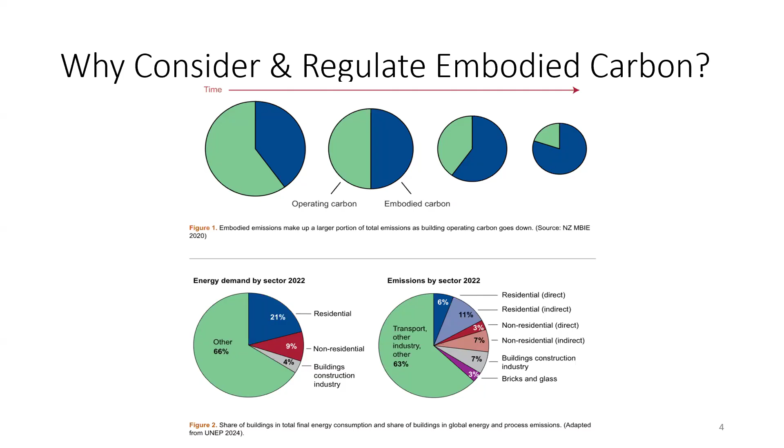If we go to the next slide - so there's a lot of work on how you break these into life cycle stages and modules. As Luke had said, traditionally we focus just on operational carbon, down at the bottom, the B6 and B7 categories. I suspect there are people participating who know a lot more about this than I do, but we break things into upfront carbon, the products and construction, A1 through A5, then what happens in the use of the building other than the operational, then end of life. All of those are called embodied, the A, B, and C other than the operational.

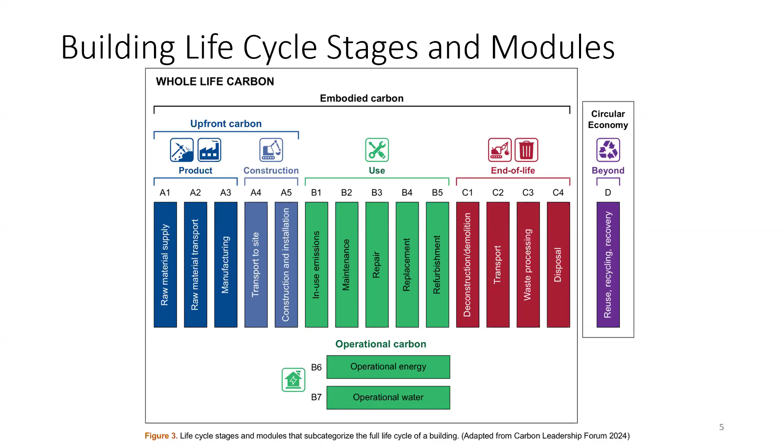When you put the embodied and the operational together, you end up with whole life carbon. This comes from a number of different international and European standards, some of which are in the midst of updating, and we'll talk more about that. The terminology around whole life versus embodied - we spend some time in the report trying to get into the distinctions of that to be clear. I think a lot of people are focusing on embodied, whereas in Europe, whole life is more of the terminology typically used.

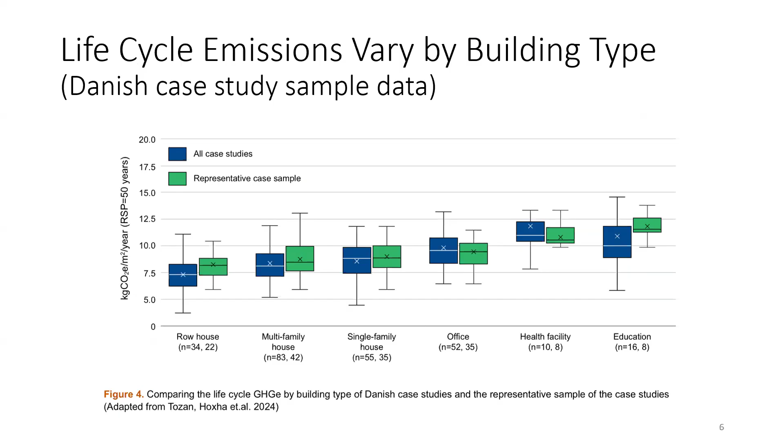So life cycle emissions will vary by building type. This is just some data from Danish case studies that led to their limits, and I'll talk about it in a moment, but the European model has more been set limits, and I think that's some of where Australia seems to be potentially evolving. This was just a sampling of a bunch of different building types - they had a larger number of case studies, then did some data cleaning. In the report, we also refer to a Canadian study in Ontario that looked at a similar, even wider range of variation by building type.

So in the report, I'm not going to get into a whole lot of detail here, but we did a deep dive trying to understand what the policies were, then summarized each of them into a page or two with a brief summary of coverage, specific scope requirements, supporting policies, and sources for additional information.

The mandatory carbon limits at this point, from a mandatory regulatory perspective, are in place just in Europe. It's great that we have Louis to speak about the French experience, and the European Union updated its Energy Performance of Buildings Directive in 2024, with a real roadmap that Bunthan will take us through.

We wanted to also look at some other mandatory requirements beyond just the limits, and we highlight in the report the City of London, Vancouver, and the state of California. Much more detail on all of these is in the report.

On the mandatory carbon limits, some of you probably already know, but these limits set a cap on the total emissions over a reference study period. The reference study period is usually 50 or 60 years.

Next slide. I'll warn you, the next few are not intended for you to read. It's a bit of a teaser to take a look in the report, but we tried to take all of that information on the deeper dives into the 9 leading jurisdictions and summarize them in a few tables.

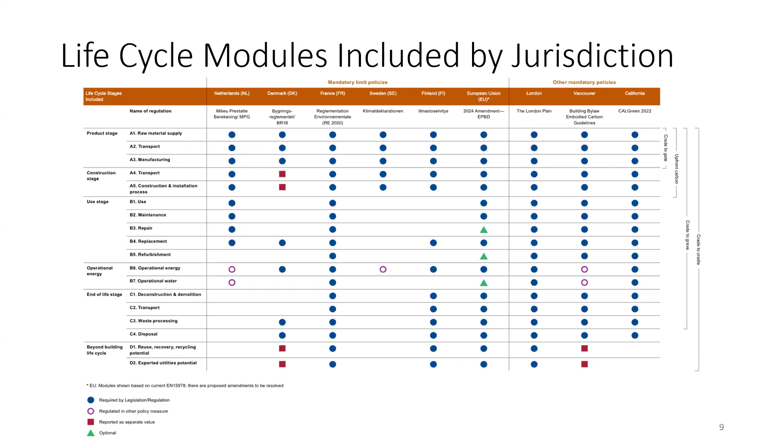The one other piece I'd mention is you can see on the right the different ways these groupings are called - cradle to gate for A1 to A3, upfront carbon A1 to A5, cradle to grave, and cradle to cradle. So you know some of the expressions used for what's included in these policies.

Next slide. This one, what we tried to do was look at the different building elements that are covered - really the base building, the substructure, superstructure, enclosure, and in many cases some of the interiors. But it varies a lot - what's covered, what's required, what's optional, cases where it's required via proxy or estimated values, and sometimes not required at all.

I'll say that a lot of these policies are evolving quickly, and even in Europe, some that were proposed a year or two ago with rules set to take effect - particularly in Denmark, Sweden, and Finland - are changing now because of the European Commission regulation and requirements that Bunthan will talk about in a few minutes.

Again, much more detail on all of this. I'll also say that from the European perspective, there's a much more detailed breakdown of the different building elements, but we couldn't get to that level of granularity for the policies outside of Europe.

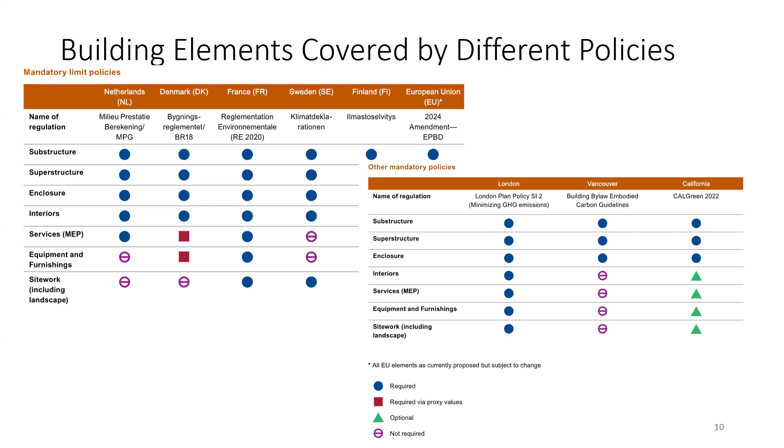Next slide. Again, we'll talk about it more in the report, but just to point people to it - there is a lot of international standards activity. Some of the early work was done through the European Committee for Standardization and the CEN standards. One of the foundational standards is EN 15978, which established the different life cycle stages. That's in the midst of a revision that perhaps Bunthan or Louis can speak more to.

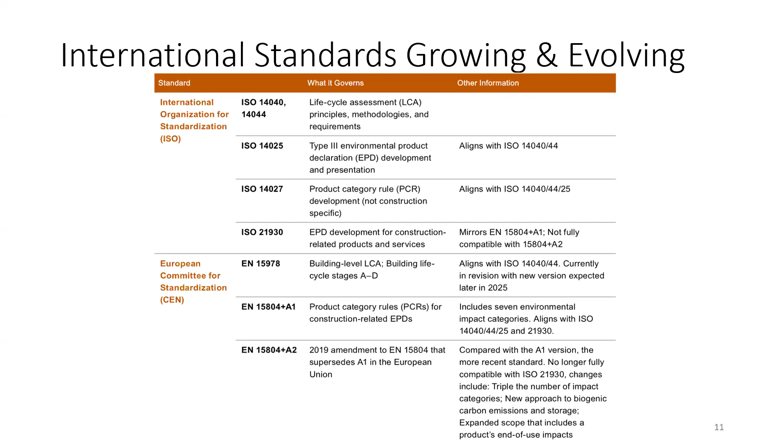Some of those standards have also been converted into or further developed into international ISO standards, many of which are in the midst of different revisions as well. Next slide.

So one of the things we tried to do when looking at all of the activity was see, for jurisdictions that don't have mandatory policies in place yet, what are some of the key embodied carbon policy design features. There was an excellent report pulled together last year by the Buildings Performance Institute Europe that looked at the key design features that need to be decided as part of any whole life carbon policy. I think some of this was in development around the time the European Energy Performance of Buildings directive was being finalized to include whole life carbon. For places that don't yet have embodied or whole life carbon policies in place, I really encourage you to take a look at this Buildings Performance Institute Europe document as a great source of information.

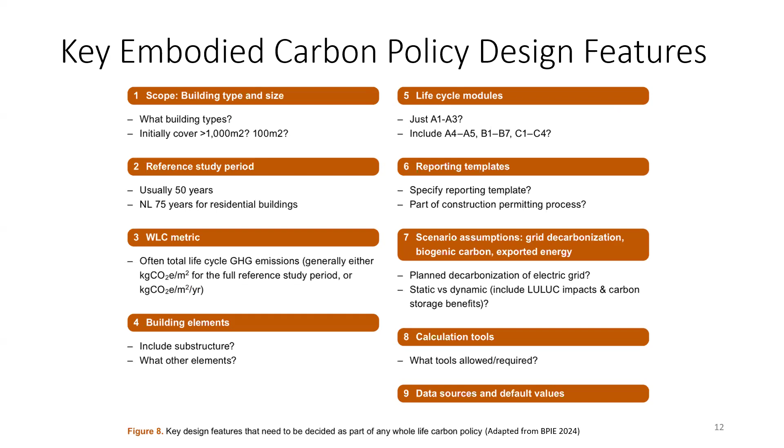But then really a lot of information about getting stakeholder involvement and data. You'll see in the report, access to data, availability, and digitalization of environmental EPDs, really trying to get people and main stakeholders familiar. I think this is where Louis will be able to speak to how things have evolved and gave us some great information about how the French process has evolved over the years.

Next slide. I'm going to point you toward the conclusions of the report. It's relatively early days. The Europeans are really way out in front on this. I think we heard from several of the European leading jurisdictions that they are seeing a lot better data collection and consistency in reporting, though it's somewhat early to understand whether we're seeing drastic changes to construction practices yet. There's a lot of variation. You can see from the summary tables how the coverage of things varies a bit.

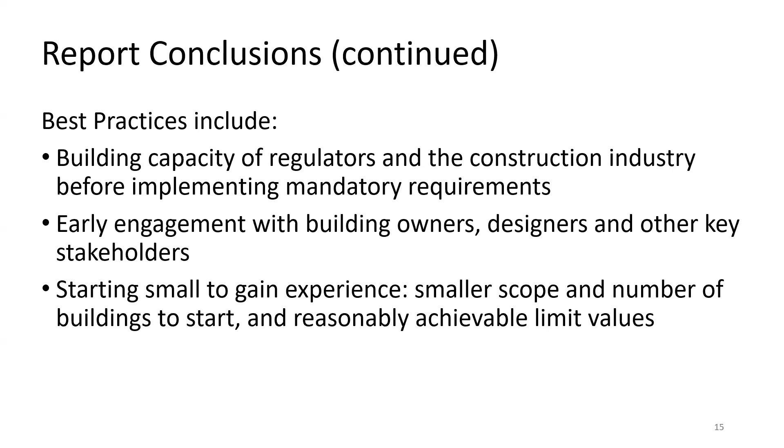And last slide, here's a link to the full report. Maybe we can paste that in the chat as well if people want to look. And I've got my email address here. And with that, I'll turn it back over to Ivana.

Thanks, Adam. Yeah, that was really interesting. I know you mentioned how quickly these policies are changing and evolving, and I think you can definitely see that in your research.

I know when NABERS started looking at developing an embodied carbon tool just a couple of years ago, at that time it almost felt too early, and it was like 12 months later that it was too late. So it's really interesting to see a lot of that also reflected in your research as well.

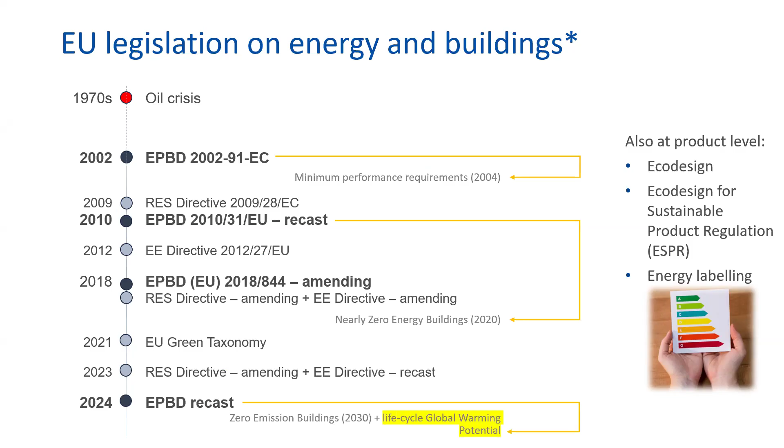The idea behind introducing these new provisions is that the directive recognizes the fact that buildings, during their whole life cycle, from construction, use, to end of life, have emissions throughout. Not only during the use phase, which is related to energy and has already been covered for many years in the directive, but they begin to consider also the other parts of emissions, including the production of materials, the construction of the buildings, and of course when the building is demolished at end of life.

We've seen in a couple of studies in Europe, when we look at emissions of the building stock, for certain years the big bulk of emissions, about 80% more or less, is related to operational emissions, while about 10% or more are related to embodied emissions, which is of course less than the operational part. But we have to understand where they are coming from.

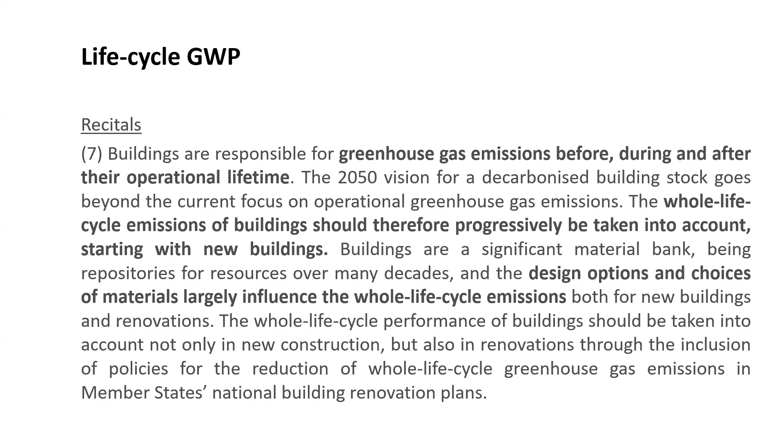In the latest version of the directive there are two main provisions related to life cycle global warming potential calculations and limit values. The first is Article 7.2, requiring member states to ensure calculations are done for large new buildings from 2028, and for all buildings from 2030. On the other hand, the directive also requires member states to publish and notify a national roadmap detailing how they're going to use the limit values on life cycle global warming potential starting from 2030.

And the directive is adopted. We are now in the phase of the implementation of this directive.

At the Commission side, we are working on a couple of documents. First of all, according to Article 7.3, the Commission is empowered to adopt a delegated act to set out a unified or union framework for the calculations at the European level. The idea is that we have a couple of countries who are front runners and have already implemented their regulations for years, not necessarily with an identical approach. The idea is to begin now to implement harmonized frameworks so we don't continue to diverge, but start to progressively converge to a common approach.

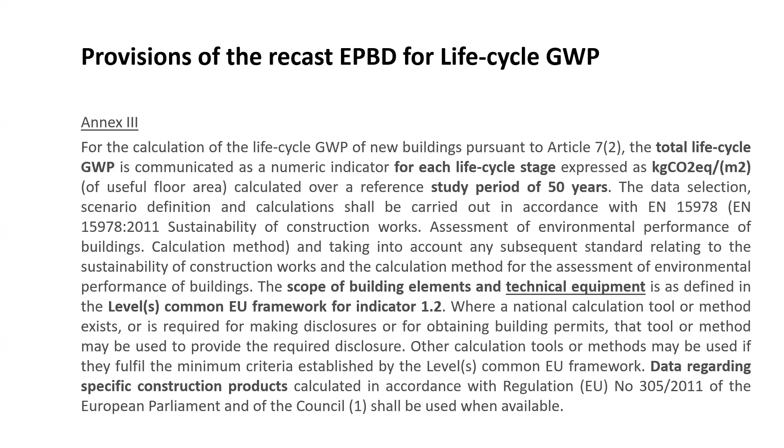There's also specification regarding the scope of building elements, which has to be inspired by or in line with the Levels common European framework right now. And one of the most important aspects is the data to be used for the calculation at the European level. In parallel, we also have the Construction Products Regulation, which is going to require that building products declare their environmental performance. So when data is available under such a regulation, it has to be used for this calculation at the building level.

So the idea of this delegated act or delegated regulation is not to reinvent everything. More or less, we are going to follow the logic already set out in Annex 3, giving a couple of considerations, for example, on the general frameworks. One of the standards that Adam mentioned earlier regarding how to do the calculations, EN 15978, seems to be one of the solutions that is going to be adopted on the European side, at least because it's already widely used in a number of front-runner member states, and also in line with Levels as well.

In this delegated regulation, we're going to specify or clarify a number of other aspects, such as the scope of life cycle stages required for the calculation, the scope of building components, the reference study periods, more or less confirming what is already set out in Annex 3, when to do the calculations, and the data to be used for the calculations. Some notions on useful floor areas too, because when we talk about units earlier, the GWP is to be reported as kilo CO2 per meter square, and the idea here is what is the meter square, and finally the reporting format of the result.

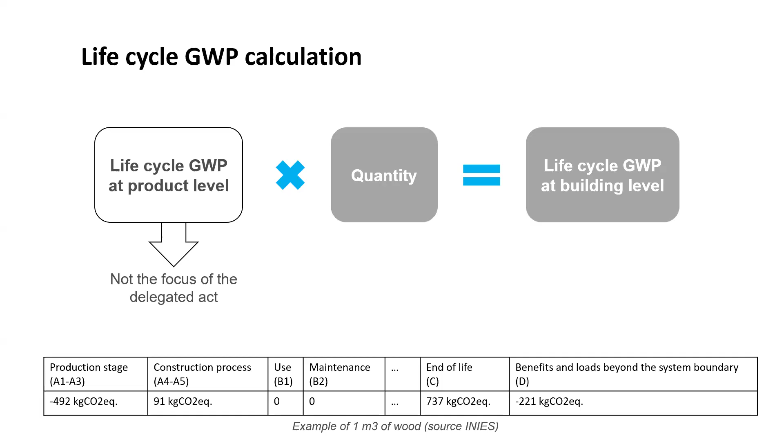Next slide, please. This is the guidance related to Article 7.5. The idea here is the member state has to do this national roadmap, and from the Commission side, we're going to issue this guidance to help support the member states. What I can tell you is that member states are required to set out limit values with a progressive downward trend from 2030, and if relevant, they have to distinguish these limit values according to climate zone and building typologies.

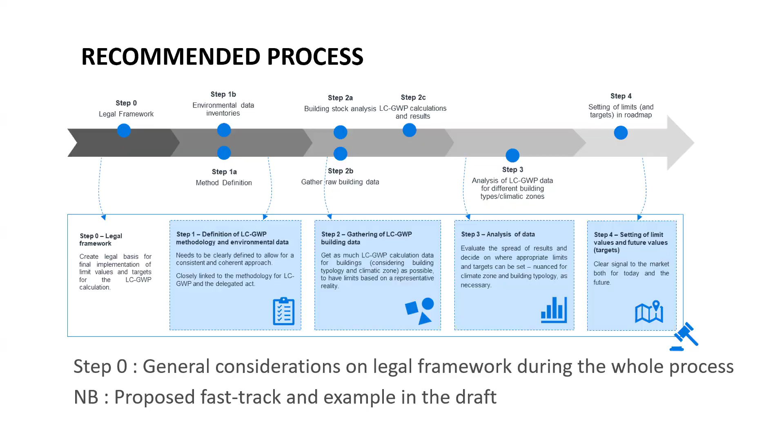Next slide, please. What you'll find in the final outcomes of this guidance is more or less a recommended process, step by step, for member states, especially those who don't have regulation yet, from the beginning until the moment they can have their regulation. Next slide, please. Yes, and I think that's the end of my presentation.

Thank you so much. Thank you, Bintan. That was really great to see. It's really great to see the work that the European Commission is doing to create a harmonised approach to tackling whole-of-life carbon in buildings. I know our experience here in Australia is that for operational emissions in commercial buildings, having a harmonised approach has had a huge impact in terms of accelerating progress.

Next, I wanted to introduce Louis Brou, who is the Director of the Low Carbon Building Projects at the French Public Agency of CEREMA. Louis will talk about the French carbon regulations and some feedback that they've received after 3 years of application. Over to you.

Yes, thank you. Thank you for inviting me to talk about RE 2020, the French environmental regulations applying to new buildings based on life cycle assessment. I'm working at CEREMA, a French public agency developing public expertise in the fields of ecological and energy transition.

Next slide, please. Over the past 8 years, I've accompanied the development of these new regulations with the French government. So since 2022, these regulations apply to new housing, office, and educational buildings. We now have 3 years of feedback on its application.

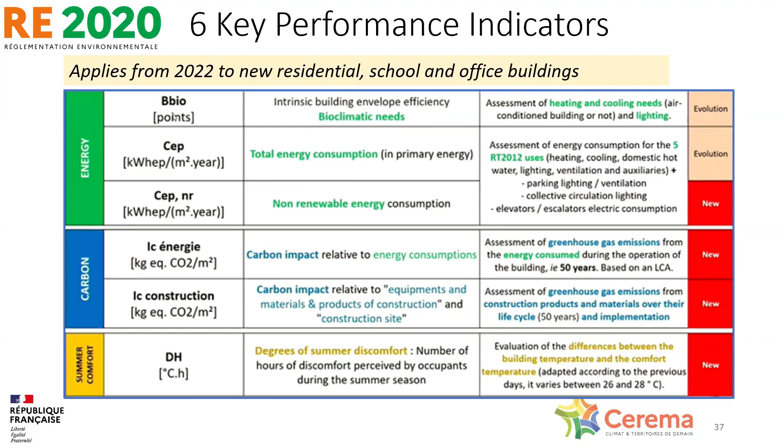This regulation is based on 3 pillars: energy, carbon, and summer comfort. But we will focus here on the whole life carbon aspect. We define 6 key performance indicators that I will let you read later, because we will focus on the blue ones, IC energy and IC construction, which are carbon impact relative to energy consumption during 50 years of life in the buildings. For IC construction, this is the impact of equipment, materials, and construction during the building life cycle.

Next slide, please. So how do we rate IC energy, the carbon impact relative to energy? That's simple. We simulate the energy consumption and we convert it to emissions using conventional carbon coefficients defined by the government for each energy source. We have a demanding threshold that has progressively limited the use of gas heating and the use of electric radiant panels. RE 2020 encouraged the use of heat pumps, wood-fired boilers, and central heat networks.

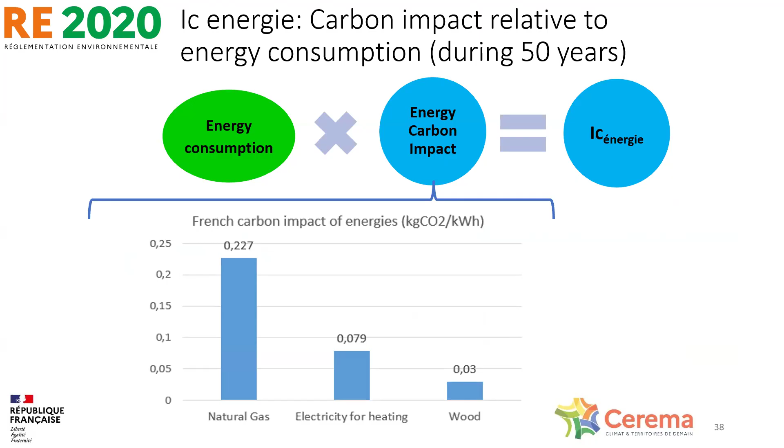How do we rate the building impact? We assess the building's entire life cycle on a 50 years study period, including all stages from A to D, as it was explained by Adam.

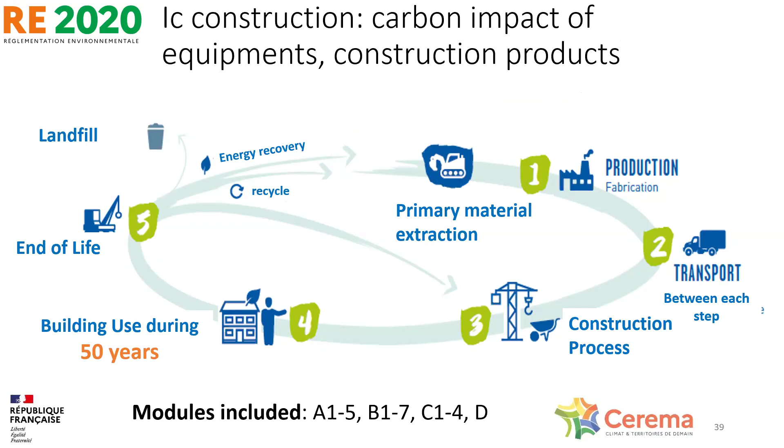So where do we find the product data? We find it in the French mandatory database called INIES. The declarations are made on a voluntary basis by the manufacturers and verified by an independent third party. We have more than 4,500 product declarations and 1,500 equipment declarations.

In case of lack of data, the government has built default data you can use, but which have an increasing impact compared to the other manufacturers' data.

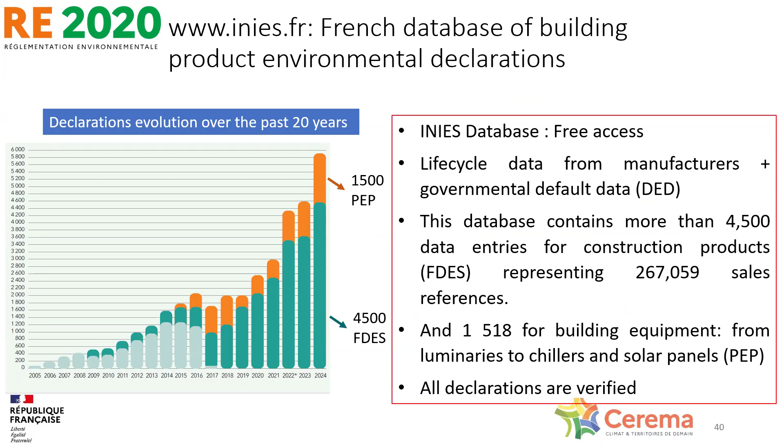So what is the limit value for buildings' carbon impact? The government defined an increasing requirement over time that will decrease by 35% between 2022 and 2031 in order to follow the French carbon neutral strategy. All these thresholds are expressed for 50 years of life cycle.

This reinforcement encourages, as you can see, biosourced materials such as wood, hemp, or straw, because they can store carbon during their growth and then keep it inside the building during 50 years. And the RE 2020 will curb the use of steel and concrete, which emit CO2 during the manufacturing process.

Also, the French government decided to add a new calculation rule in the RE 2020 LCA to take into account the temporal dynamics of storage and emission. We call it dynamic LCA. The greenhouse gas emitted today carries more weight than carbon emitted later, for example, in 50 years. So we apply a corrective coefficient to the emissions, evolving from 1 today to 0.57 in 50 years.

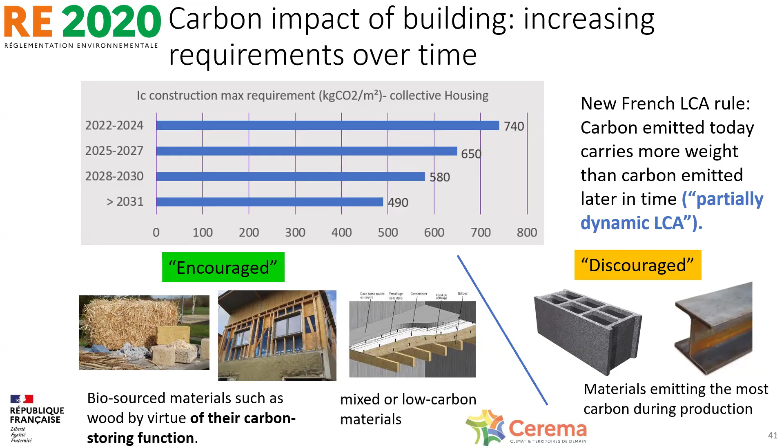What about the other buildings? After 2 years of work and simulations to define thresholds, the regulations will come into force in 2026 for all the other building types you can see listed here. So we will have a limit value for libraries, hotels, restaurants, shops, air terminals, industry, and all the other buildings you can see here. It was a long work, but now we have found limit values that can fit our carbon neutral strategy.

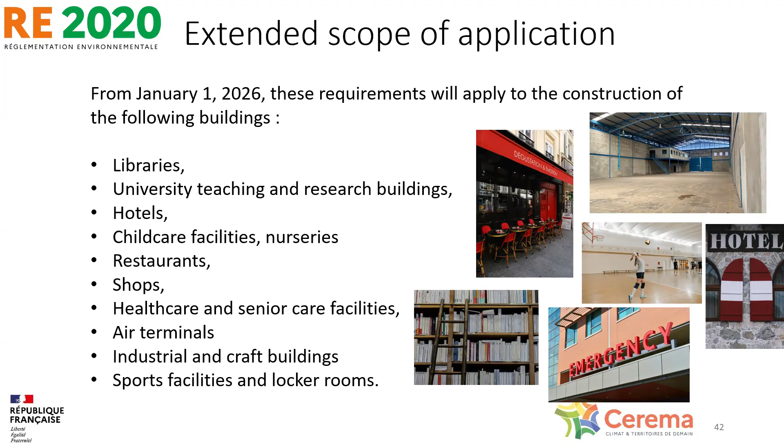Since 1 year, professionals have free access to a national database containing the performance of all projects since RE 2020 came into force. You have the performance at the permit level and the performance of buildings constructed. This is an invaluable tool to know the construction trends evolution and to know the margins that projects have over these thresholds.

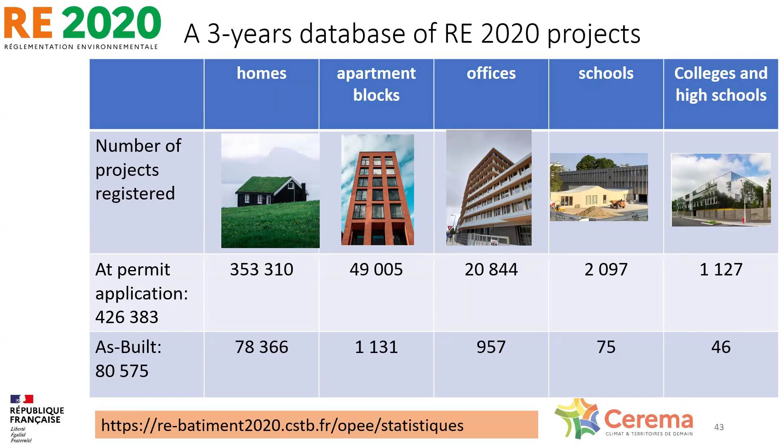So I can talk to you about some lessons from the first 3 years of application. We have found that design offices and architects have now mastered the LCA and are learning to use it in the design process. The environmental product declarations have been refined and multiplied with less impact than in 2022, thanks to process optimizations.

And what do we learn about building with less carbon? We have realized that levers in building design and layout can have a major impact on carbon weight, especially if you want to continue building with concrete structure. For example, in apartment buildings, we can't reach our 2028 limit value with a non-optimized floor plan and non-optimized compactness, because it's necessary to limit the surface area of poured concrete if you want to limit carbon.

We have found that the facade lot is not the one that weighs the most, but it's the most variable. It can range from 50 to 250 kilograms CO2 per square meter. The level of glazing in facades has an impact on carbon weight too, as windows weigh more than walls, even if a certain amount of natural light must be preserved.

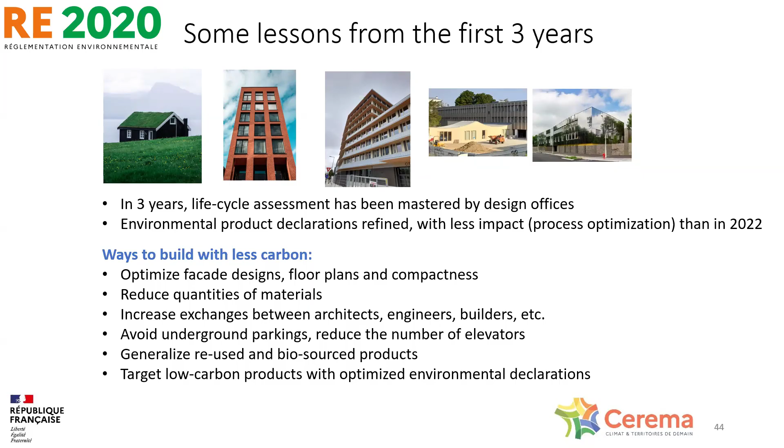Thanks, Louis. Yeah, I hadn't actually heard about the concept of dynamic LCA before, so that was new for me. And yeah, it's really promising to see the French experience and how quickly industry is mastering life cycle assessments in such a short period of time.

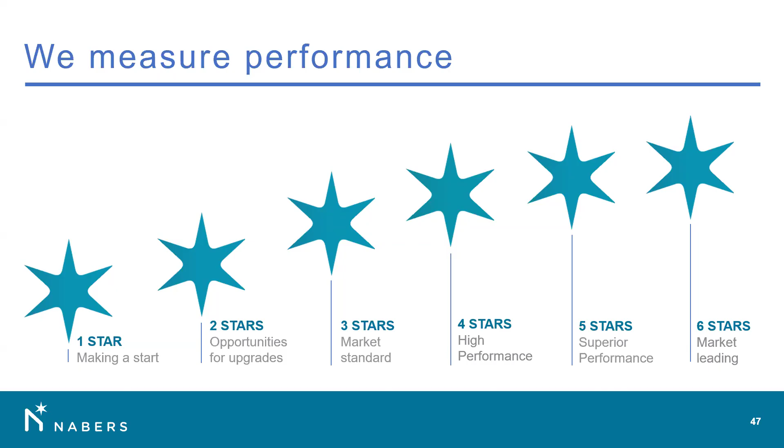Great, thanks, Ivana. Yeah, we can skip this slide. So I'll do a little intro to NABERS first so that you can understand what NABERS is, what we do if you're not in Australia. NABERS rates the environmental performance of buildings on a 6-star rating scale, which is really easy to understand where you sit compared to the rest of the market. It's really easy to make a target for a certain star value.

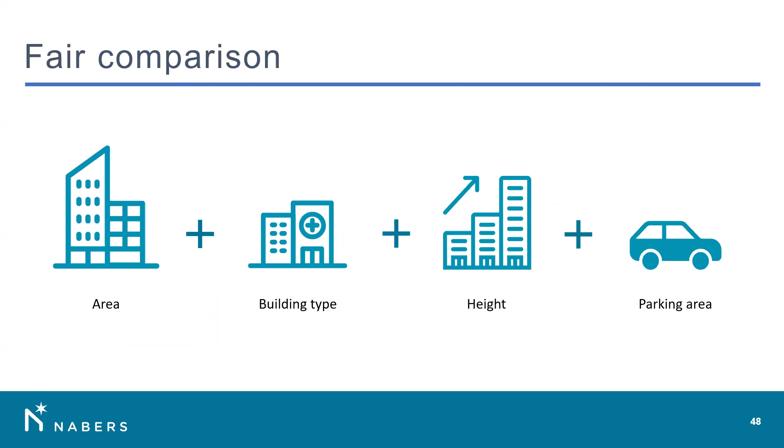And when we create that star rating system, the algorithm behind that is based on data from real buildings, from a lot of buildings, and we make corrections for things that affect the ones on the screen here. You're seeing, for example, other things that affect embodied carbon in a building. So we correct for things like area, building type, building height, and parking area, because they all have an impact on how much embodied carbon there'll be in a building.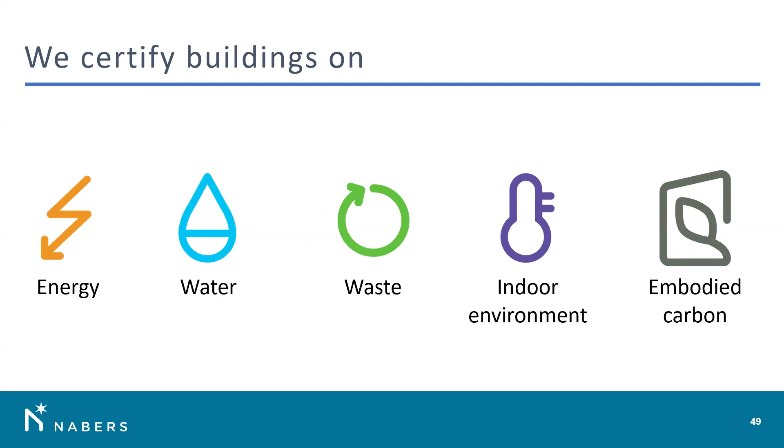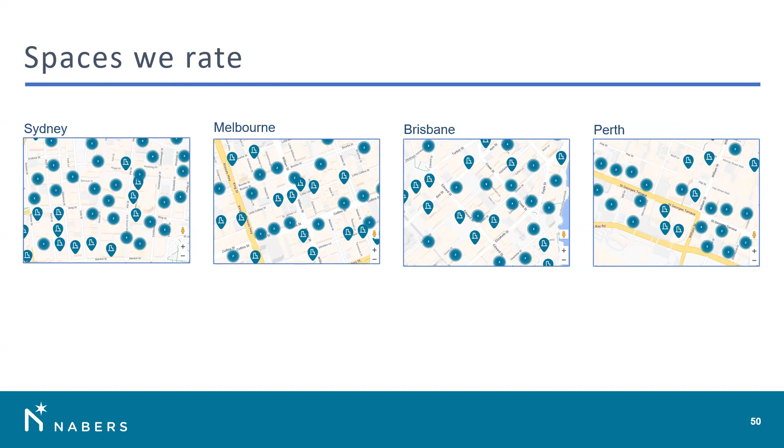Next slide, thanks. So yeah, we don't just certify buildings on embodied carbon. We started out with operational energy, and we have a bunch of different rating types for most building types that are not standalone houses. And because some NABERS ratings are mandated by the government, we're kind of all over the place, really. You can see just some examples here from big cities in Australia, the number of ratings that we have. These aren't embodied carbon ratings yet, hopefully soon, but these are operational energy ratings mostly at the moment.

Next slide, thanks. So yeah, we started developing the Embodied Carbon rating tool back in 2021. And the way that we went about it was working really closely with industry. So we've spent a few years engaging with everyone who's involved in developing buildings, from owners and developers and engineers right through to policymakers and building product manufacturers.

And what we've been doing with everyone is figuring out, okay, well, if we're going to create an embodied carbon rating system, how do we do that? What's involved? So answering things like, what life cycle phases are we trying to include in the rating? What is the scope of what we're measuring in terms of materials? Are we going down to the fit out and measuring absolutely everything, or should we be more focused on the materials that make more of an impact, like the concrete, aluminium, steel, that sort of thing? So yeah, we've been working closely with industry to make decisions about all of those things and make sure that everyone around Australia agrees that what we're creating is useful, appropriate, and usable.

Next slide, thanks. And yeah, we have finished creating the tool now. It's ready and live for people to use. And basically what the Embodied Carbon tool is these 5 things. So first of all, rules, a set of rules that standardize what you're measuring, how you measure it, what emission factors to use, all of those sorts of things, so that everyone is doing an embodied carbon rating consistently.

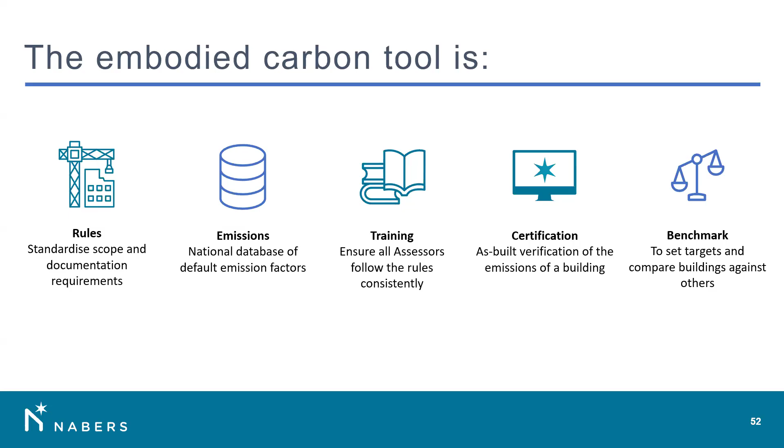Then we have certification. NABERS receives a rating from an assessor and we audit that rating to make sure that it is done in line with the rules, to make sure that the evidence is right, to make sure that when you see a NABERS embodied carbon rating, you can trust that the information and the rating itself is accurate. And then finally, the benchmarking, so that 6-star system, so that you can easily see at a glance where your building sits compared to the rest of the market in terms of whether it's performing well with low emissions or if there's still work for you to do.

So I'll talk through just a few of the main themes of the tool. This tool measures upfront embodied carbon. We certify upfront embodied carbon A1 to A5.

The reason we are focused on upfront carbon is because in Australia, that is the biggest part of the picture for new buildings. Around 65 to 75% of all embodied carbon is upfront carbon, and we know that urgent action is needed in the next few years.

Of course, we don't want to ignore whole of life carbon because we should be making decisions today that are informed by whole of life considerations. So in the tool, we do have a whole of life calculation that you can easily use to check what you're doing and make sure you aren't having any unfortunate whole of life impacts.

But what we are actually certifying is the upfront embodied carbon, because when the building has been built, you know what's been used. It's very clear and easy to certify that emissions number. And if we were to try and certify whole of life, we'd need to make assumptions about the future, which are likely to be incorrect. We don't want to be trading off higher emissions now for things that may or may not happen in the future when we're actually doing the rating.

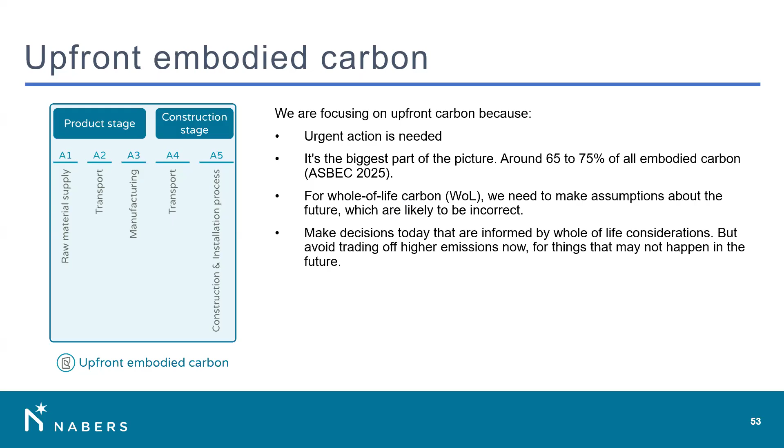In terms of measuring upfront carbon, pretty simple in a way: quantity of each material times the emissions of that material, and then we add on transport, construction energy, and emissions from construction waste.

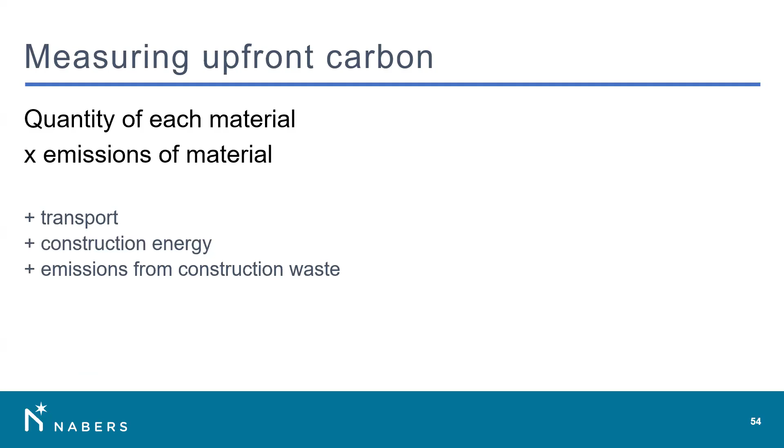To go into a bit more detail, in terms of scope, what materials we're measuring, we're really focused on the main structure of the building. So substructure, superstructure, envelope, some of the internal items which make a bigger impact, such as stairs, floors, internal walls, and then also building services and vertical transport.

We don't include things like fixtures and fittings and fit out materials in the rating because that would be more difficult to do in terms of collecting information and collecting good information about the emissions for those things. And also it would be harder to be very consistent.

So in terms of what we're measuring in a rating, we're looking at things that are in control of the developer. It makes it a lot easier and more consistent if we're not trying to rate fit out as well. But with the base building that we are rating, we're capturing about 90% of emissions involved in a new building on average.

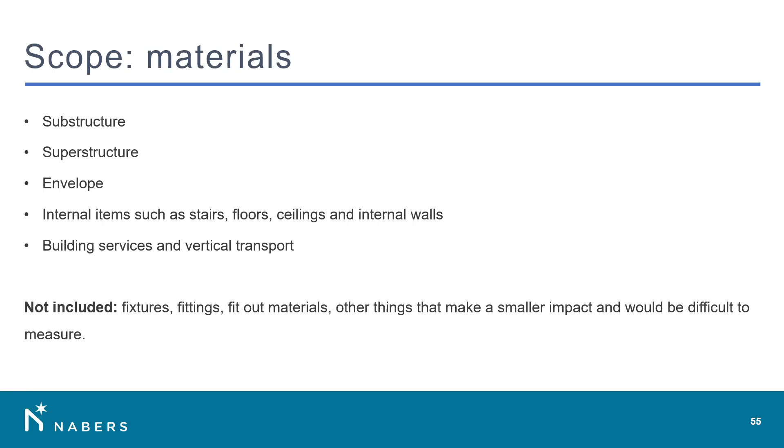To give you an idea of what that looks like, you can download our rules and take a look if you like, but you can see it's pretty consistent across different building types. Just retail and industrial, you can see down at the bottom right there, we don't include internal walls for ratings for those two building types because internal walls can typically be part of the tenant fit out, so not in control of the developer.

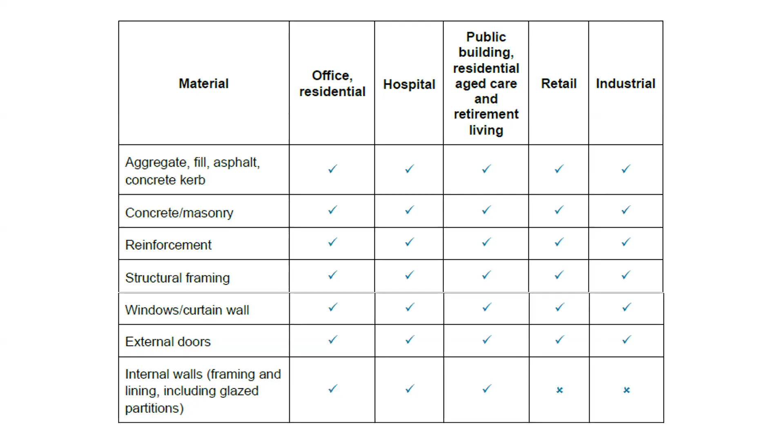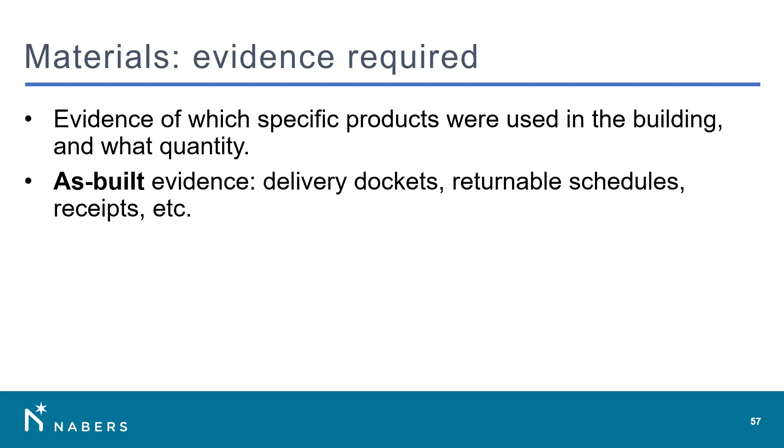We're really focused on evidence of what was actually built. So we're talking about things like delivery dockets, returnable schedules, receipts, so that we know when we're doing a rating, we're rating exactly what was delivered to the site, the product and how much of it.

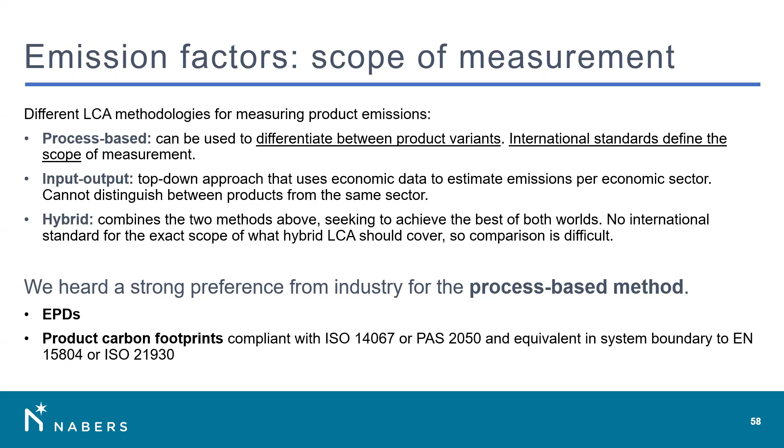Next for Australia, in terms of deciding what emission factors to use, we have a bit of a unique situation here where we had an emission factors database that was very popular, which was hybrid data. When we did consultation with industry, we heard very strong preference from industry for our tool to use process-based product-specific emission factors. So what that means is EPDs or product carbon footprints that are compliant with the same international standards that are used for EPDs, or that have an equivalent system boundary to an EPD.

We know that, of course, all of the products that you're going to put into a building, it's very likely that a fair few of them don't have a measured emission factor, that they don't have an EPD or a carbon footprint. So we developed a set of default emission factors that you can use if you don't have measured data. We developed this really closely with industry, working with product manufacturers and consultants and various people in industry to make sure that we were doing this the right way. In a nutshell, what we did was collect all of the EPDs that are available for all of the building products that can be used in Australia.

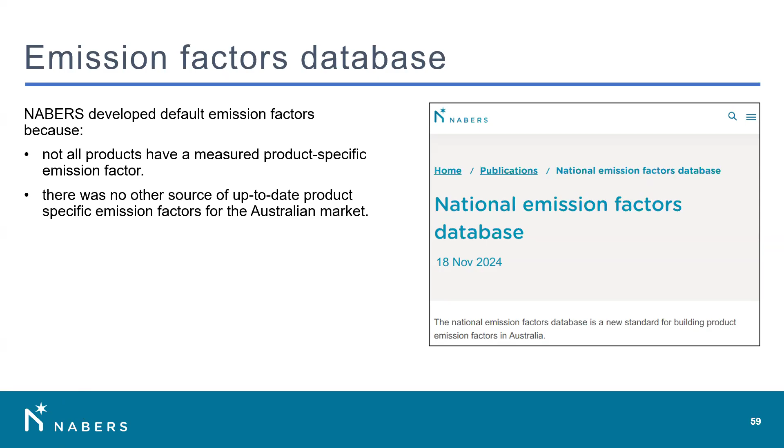Essentially, what we have is a default emission factor for each product type based on the information we collected in all of those EPDs. This is available to download, so you can read through the details if you like. We have a conservative default emission factor to use if you don't have measured data for your product, and that conservative default is typically the worst emission factor found in any EPD in that product group, plus a bit of uplift for uncertainty.

So you can see for concrete in situ, the one at the top there, we've added 10% on because for that product type there was limited data. For the ones where we had a lot more data, we've only added 2%.

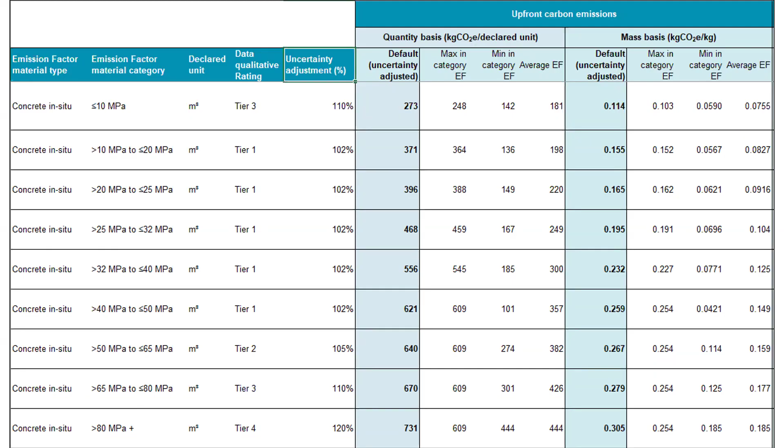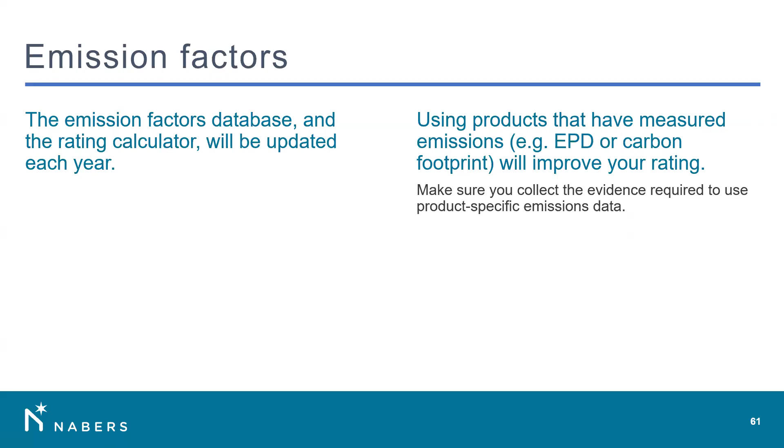So that emission factors database, we're keeping it updated. It's being updated every year. And of course, because the defaults are conservative, if you use products that have measured emissions, such as an EPD, that will improve your rating.

I think the last important thing is the NABERS embodied carbon rating system has national agreement here in Australia. We developed it in partnership with the Green Building Council and industry. It's aligned with international standards for measuring embodied carbon. We've worked closely with infrastructure to make sure that buildings and infrastructure are both approaching this in the same way, to make things really easy and consistent for everyone.

And it is already in policy in a few places. I think probably the biggest example is that this will be a voluntary pathway to meet the requirements in the next update to our National Construction Code, which is coming fairly soon.